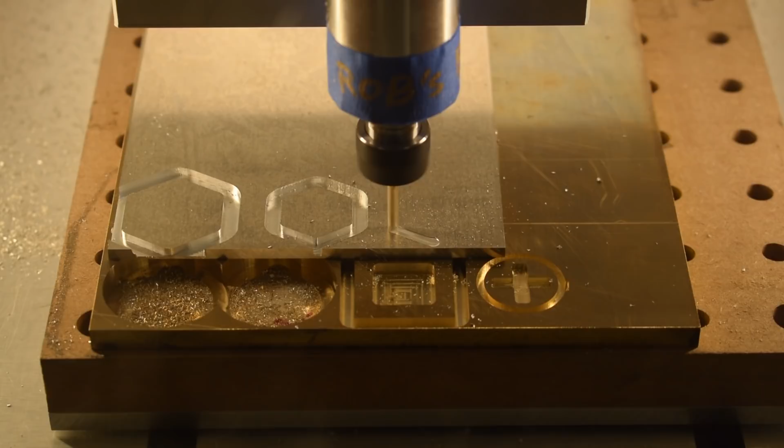Contour operations are hands down the fastest way to get through material. But when you're trying to cut through thicker pieces of stock, particularly in metals, these toolpaths can bring a bit of extra drama to the equation. Without the absolute rigidity found on industrial-grade machines, any extra friction from touching both walls, bad chip evacuation, and/or suboptimal feeds and speeds can kick off some pretty nasty chatter and bog down the spindle.

So how can we get around that problem? By using toolpaths that provide end mill and chip clearance. Reducing wall contact and providing ample room for chips to get out of the way will ensure that your spindle keeps humming along and your cutter can clear its flutes. The easiest way to do that is to enable a roughing pass with your 2D contour operation in Fusion 360.

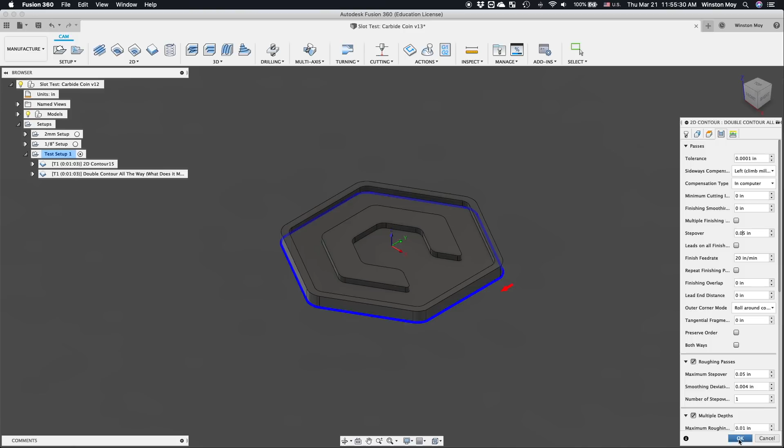That runs the toolpath in 2 or more passes per step down, and it means that the end mill will only really be rubbing one wall at any given time. And if you play your cards right, that second pass on any given step down will be a very gentle cut, so it should produce really clean and accurate results. The only downside is that your cut takes twice as long, but there was some time penalty to be expected here since you're removing more than the bare minimum of material.

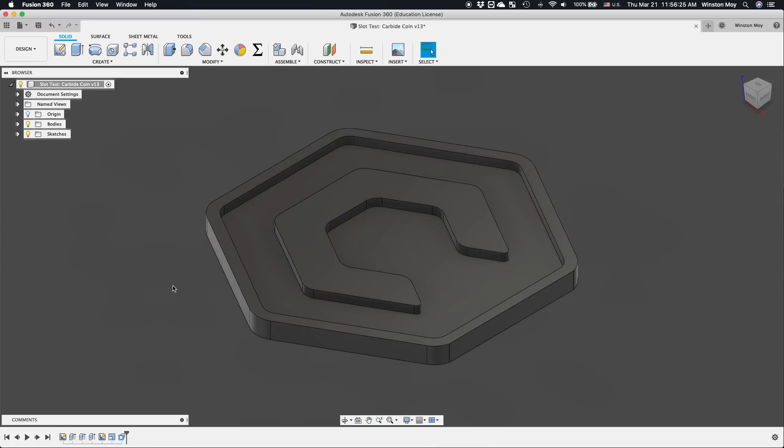Another option, which is my preferred strategy if time isn't a factor, is to use an adaptive toolpath. This way you get the benefit of tightly controlled cutter engagement, plus it distributes the cutting action over a larger portion of your flutes for better tool life. Normally, adaptive toolpaths are used for clearing out pockets or large open regions of material, but they can be harnessed to slot through material along a contour. Here's how you can do that.

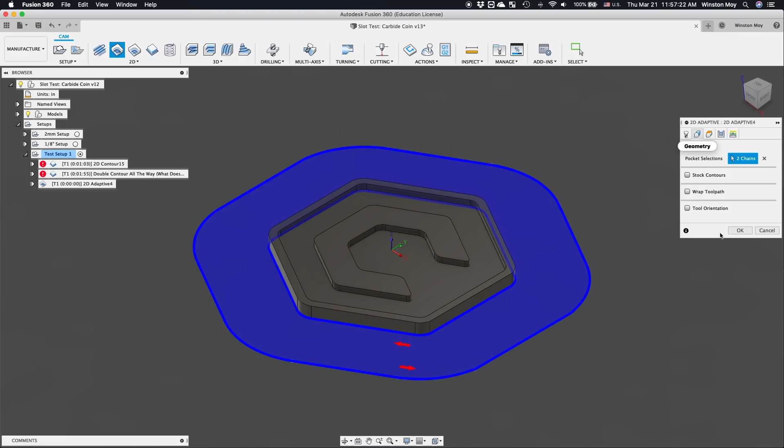In the design workspace of Fusion, start by creating an offset profile from your part. This should be about 2 times the diameter of your end mill. Then, in your CAM workspace, create an adaptive toolpath that's constrained between your part and the offset profile you just made. You can use the same feeds and speeds you'd otherwise use with an adaptive toolpath in any given material, but because the cutter engagement period is so low, sometimes I'll crank up the optimal load just a little bit so that the machine cuts faster.

Be sure the diameter of your ramp-in helix is smaller than the diameter of your cutter so that the end mill will be able to spiral in within the boundaries of your profiles. And of course, keep a few thou of radial stock to leave so you can clean up the walls with a finishing pass later.

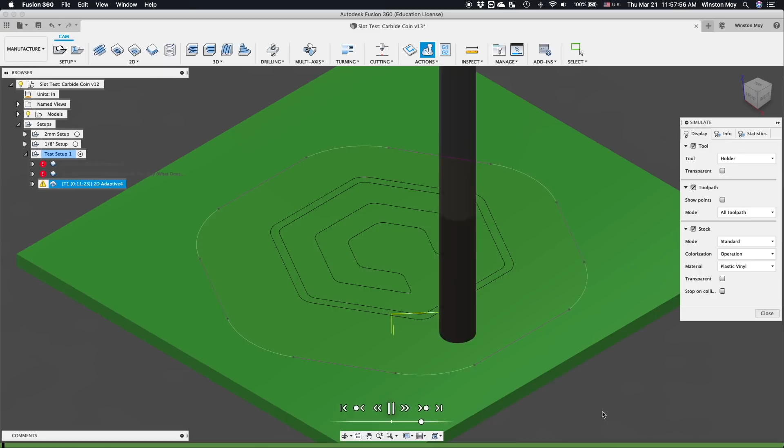The downside here is that depending on your optimal load, the time penalty can be more than double that of a plain old contour cut. The shallower each arc is, the more time is spent looping back around to set up for the next cut, even with both ways enabled. And with larger projects, the calculation time can become quite prohibitive.

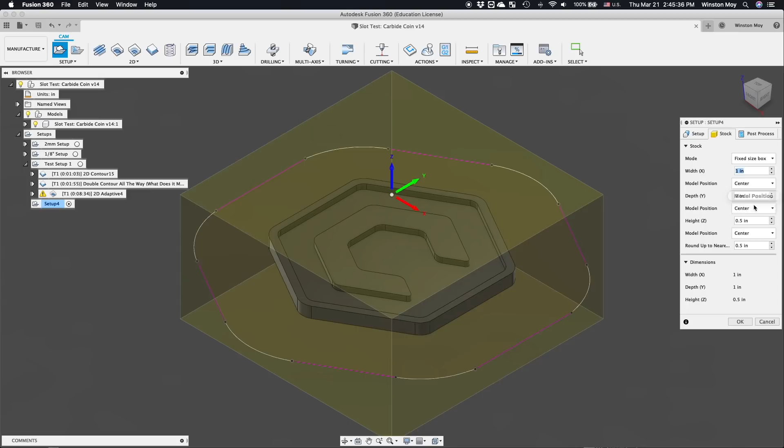If you want to get a little more advanced, you can save quite a bit of time by using stock that's sized appropriately to your model and some intelligent model placement so that Fusion can take advantage of opportunities to increase efficiency. If it sees that there's no stock on one or more sides of your part, it'll skip the small arc movements and feed in a more linear fashion.

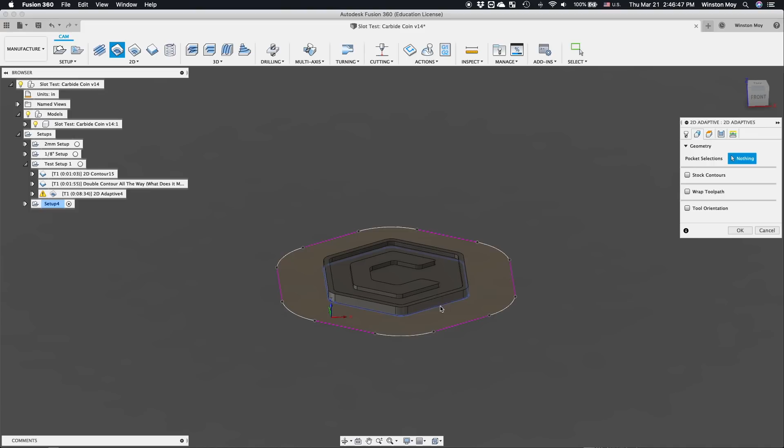To do this, you'll need to create your CAM setup in a way that accurately reflects how your stock and origin will be set up in real life. Then enable stock contours in the geometry tab of your toolpath. Now, Fusion will know it can feed more linearly when the end mill is not fully surrounded by stock.

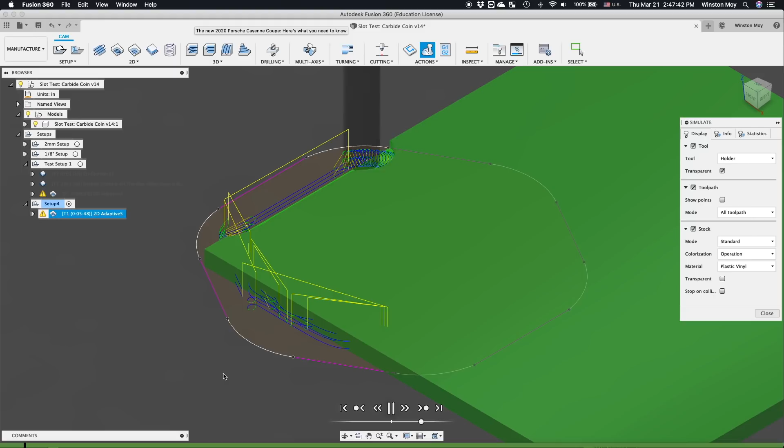So these are 2 strategies that you can employ to take some of the anxiety out of deep slotting or contour toolpaths, especially in conjunction with strategic vacuum or air blast application for chip clearing. Again, you probably won't need these in wood or plastic, but if you're machining more than about 2 end mill diameters deep in metal, it might be worth opting for a slower but steady and stress-free toolpath to cut out your part.